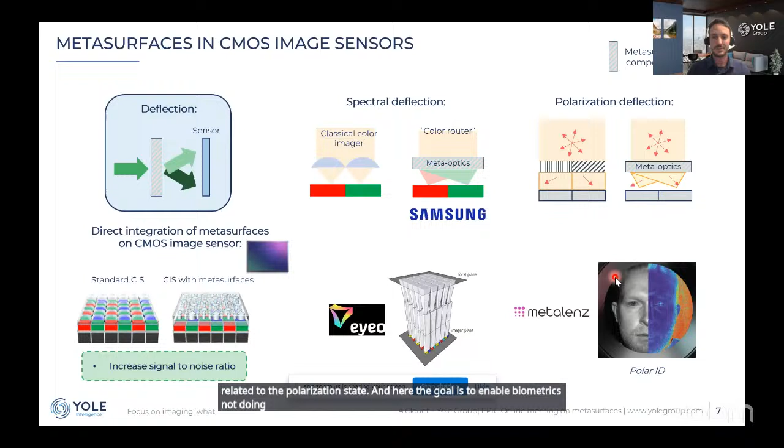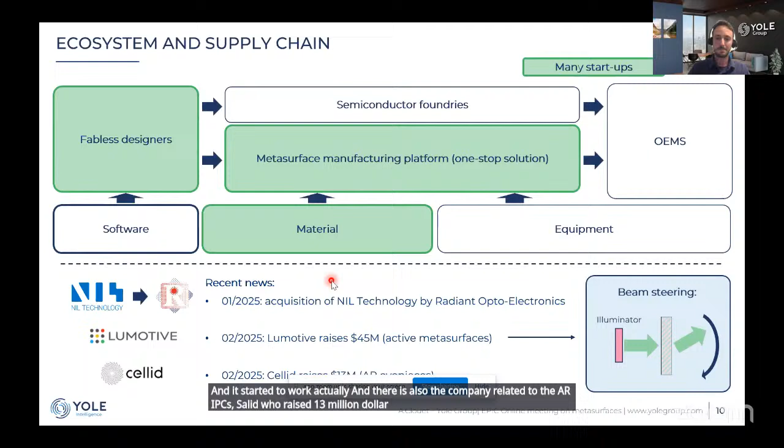And there is also the company related to AR eyepieces, Cellid, who raised $13 million a few weeks ago. Thanks for your attention, that's all for me. I hope this is a good introduction to the topic, and now I will take your questions or let the next speakers present their work.

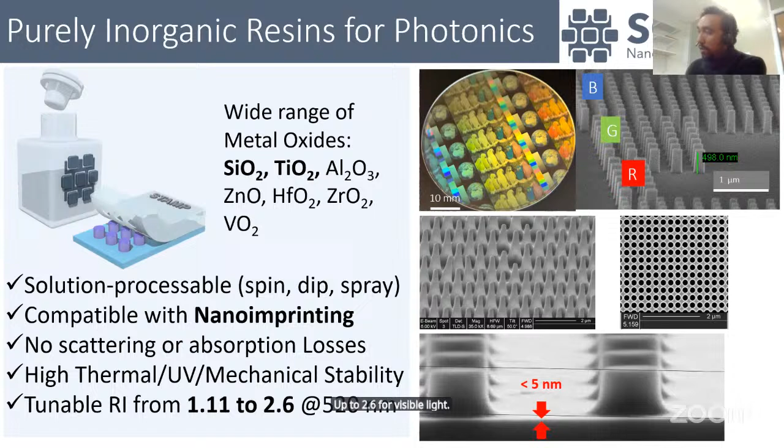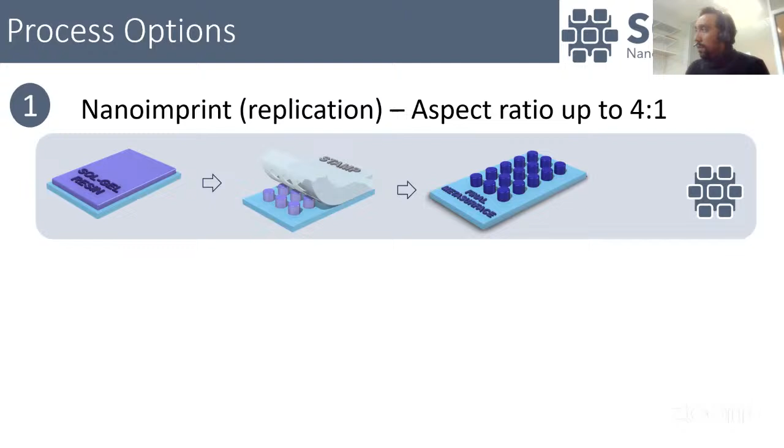Regarding the process options, our main focus today is nanoimprint lithography. This is what we developed for augmented reality applications, where you need to make these slanted gratings or binary gratings like you all showed earlier. Direct nanoimprint is suitable for aspect ratio up to 4:1. When you go to more challenging aspect ratios, although you see some publications about direct nanoimprint of high aspect ratio, I think the easiest way and what most of the industry is doing today is to use traditional top-down etching approaches, which are used today in the semiconductor industry or with microelectronics. What we propose there is just to replace atomic layer deposition or PECVD by a coating made by spin coating to reduce the cycle time, and then you can use your standard process based on nanoimprint lithography or deep UV to etch this layer.

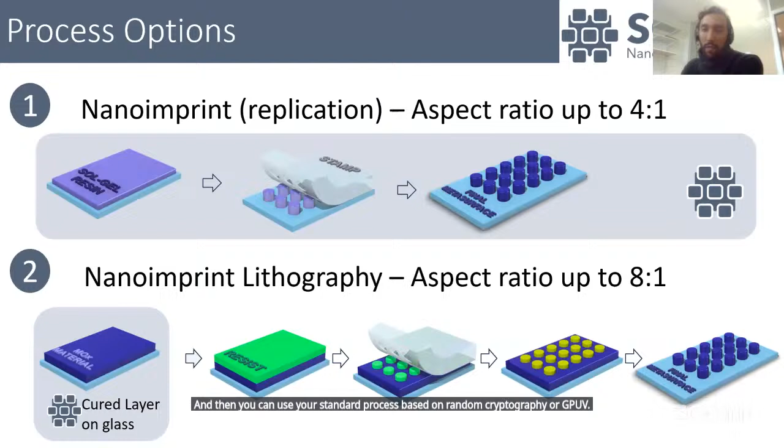So now if we come back to the refractive index range that we can cover, why is it important to have such a refractive index contrast? Usually when you work on a metasurface, the base building component is what we call a meta-atom. You have pillars, usually of high refractive index materials, and you play on the dimension to have full coverage of the phase to develop your metasurface. Usually for integration into a product, you need some kind of encapsulation layer to protect this metasurface from mechanical damages and to have better integration into your product. What's important there is the refractive index contrast of this encapsulation layer with the metasurface.

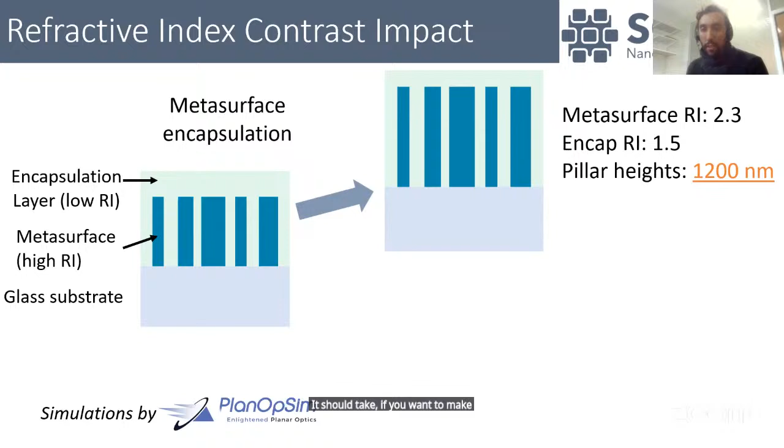If we take an example, done with the help of PlanOpSim for the simulation: if you want to make a design for visible light at 520 nanometers using a material with a refractive index of 2.3 and an encapsulation layer of 1.5, you end up having to etch pillars with a height of 1.2 microns. On the other hand, if you can increase the refractive index contrast, going to a refractive index of 2.55 for the metasurface and reducing the refractive index of the encapsulation to 1.12, now you only need 600 nanometer pillar height. So it has a huge impact on the processing. Using this wide range of refractive index allows you to simplify your process.

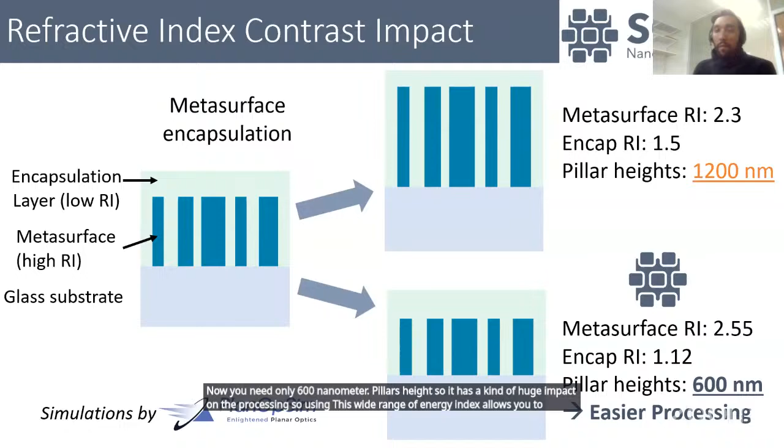So now, how did we achieve such high and low refractive index? The high refractive index we obtain using a specific TiO2 formulation. We start not with nanoparticles, it's something smaller—we start with molecular precursors, and we have building blocks which are quite specific. They have a kind of hard core and soft shell. So when you deposit this material by spin coating on a layer, and during drying, the soft shell tends to merge, and what you end up with is a very compact and dense layer, which allows us to get this very high refractive index. We managed to have very small crystal grains, which is why we managed to obtain, even for very high refractive index, this very low scattering or absorption.

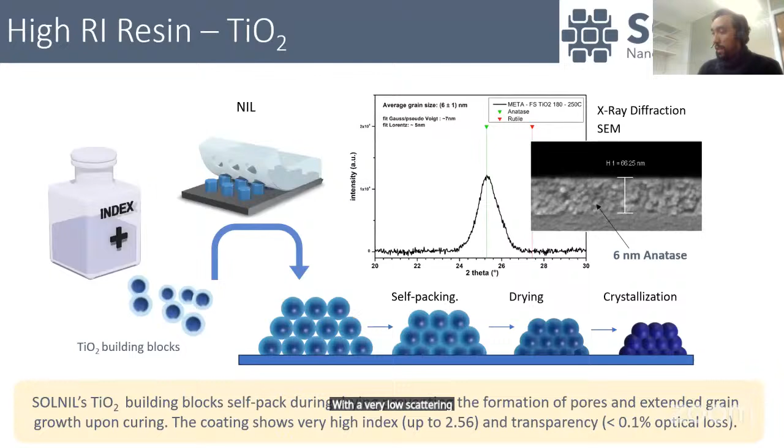For the low refractive index, the approach is quite different. We start with a silica formulation, one that can, after curing, become pure glass. What we did is manage to control the porosity of this layer. We managed to increase the porosity up to 75%, which allows us to reduce the refractive index down to 1.12. To keep the optical quality and clarity, what we need to do is not control the crystal size like we did for TiO2, but control the size of the pores. We have very small pores below 10 nanometers, and this is why we have no scattering or absorption, because the pores are very small.

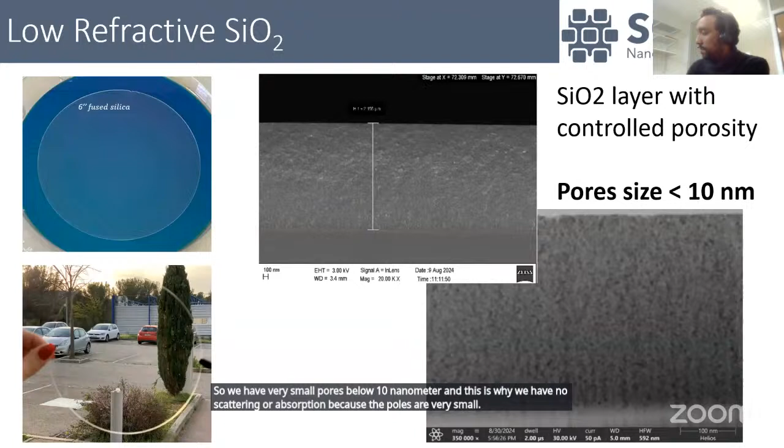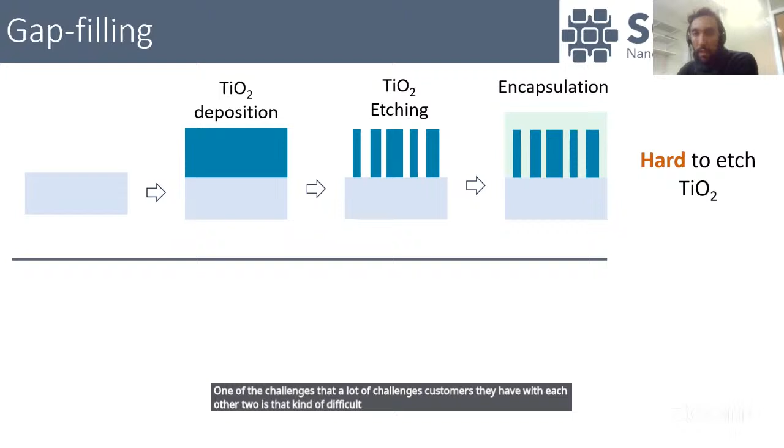This is a key. So far, what we've shown is the standard approach to make metasurfaces: you start with a thick layer of the high refractive index material, you etch it, and then you do the encapsulation. One of the challenges a lot of customers today have with etching TiO2 is that it's a difficult material to etch. They have to come up with very slow etching processes—sometimes they use atomic layer etching, which is quite slow.

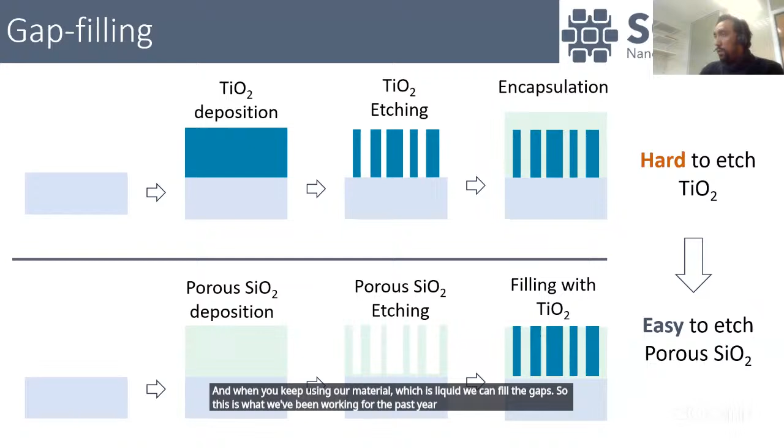So we've been working on another approach at Solnil, going the other way around. What we did first is ask: can we, instead, since our materials are liquid, just make holes in silica, because silica is very easy to etch, especially porous silica? You can very easily etch very deep grooves into silica, and then, using our material which is liquid, we can fill the gaps. This is what we've been working on for the past year. It's a process that now is working well and running for small aspect ratio, with an aspect ratio of 1, and regular patterns. So now it's something that is scalable to large area.

So basically, we just start with nano-imprinting a low refractive index material, and by using specific deposition parameters and specific chemistry, we manage to have only a selective deposition in the holes. Today it's very efficient and works quite well for standard, uniform patterns. Now we're in the process of developing this further for metasurfaces and more complex designs.

So, as a conclusion, what we have been working on at Solnil is really to extend the range of refractive index, to simplify the fabrication process of optical metasurfaces. You can find more details on our website for each material. And today, we're interested in partnering with end users or design companies who have some ideas about metasurfaces, who would like to work with us to show how our materials could enable their designs. Thank you.

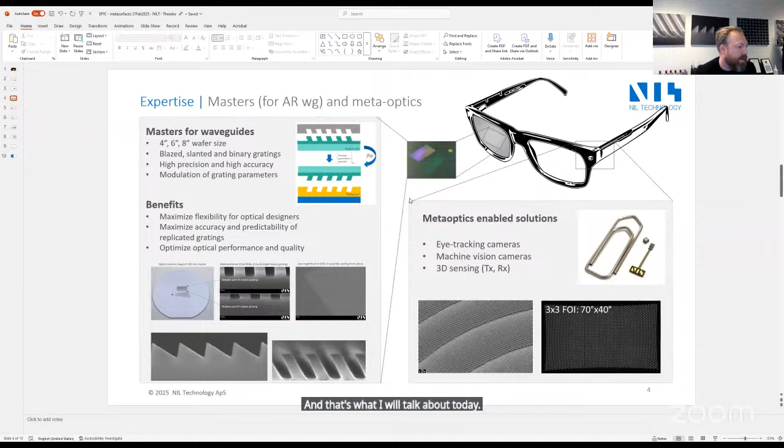I think I mentioned already, we do a lot of masters. That won't be the topic of today, but the majority of our development efforts and investments goes into establishing manufacturing of meta optics, and that's what I will talk about today. I think in this crowd, I don't have to explain what meta optics is.

What we do is bring a full solution forward for manufacturing. We can operate in what I would call a classical foundry model. We can take in designs from our customers and adapt them to our process. We can manufacture it, test it, and ship out the optics. We can do dicing, we can ship out the wafers. I think it's up to our customers.

But we also have the capacity and capabilities to take a larger responsibility. So taking in the optical specifications, we can and will design the meta optics to meet those specifications, and then we take it through the full loop again. As you will see later, we have the technology available.

We can even, and we are shipping cameras as test products right now, built with our in-house technologies. We are doing a great deal of prototyping. We do that by electron beam lithography and etching. It's a technology that's very natural for us. We've been doing this for the last 20 years.

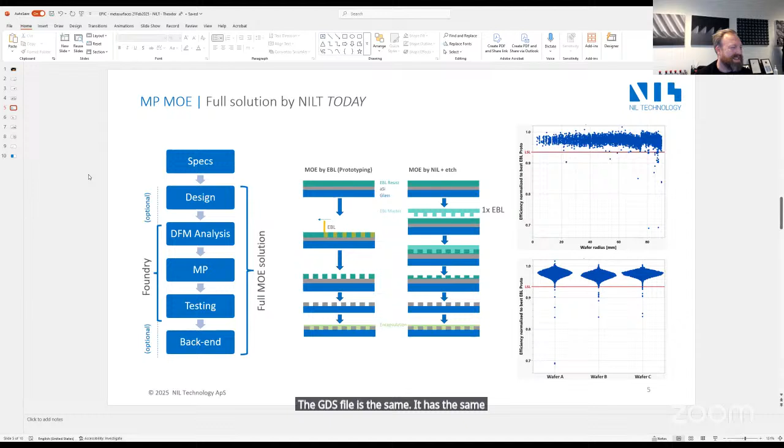This is very similar to making masters for nano imprint. Transferring the process to mass production is a very similar process to creating the master. The GDS file is the same, it has the same file size, to answer the questions from before.

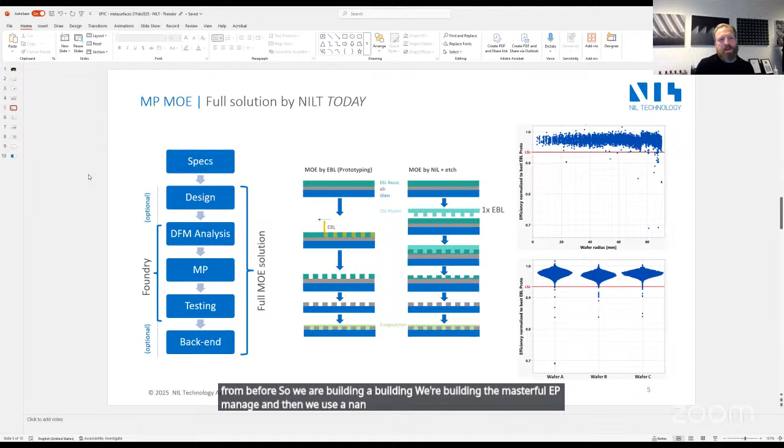So we're building the master with e-beam and etch, and then we use the nano imprint in lithography mode, as Barbara also pointed out. We're using nano imprint in lithography mode, and we use the imprinted pattern as an etch mask to etch the meta atoms out, typically in amorphous silicon in case of near infrared.

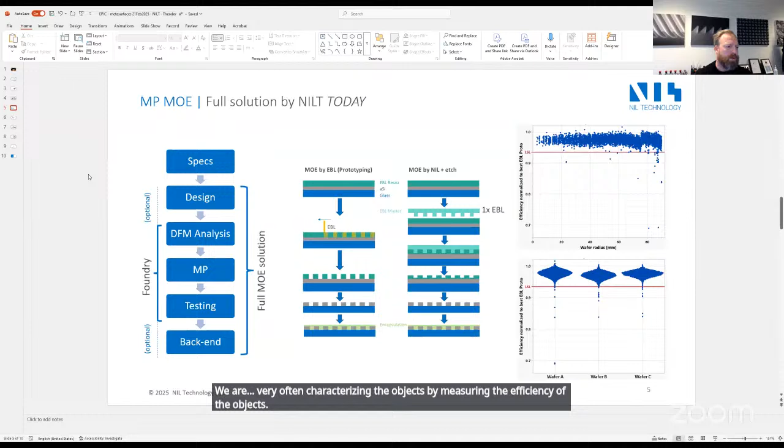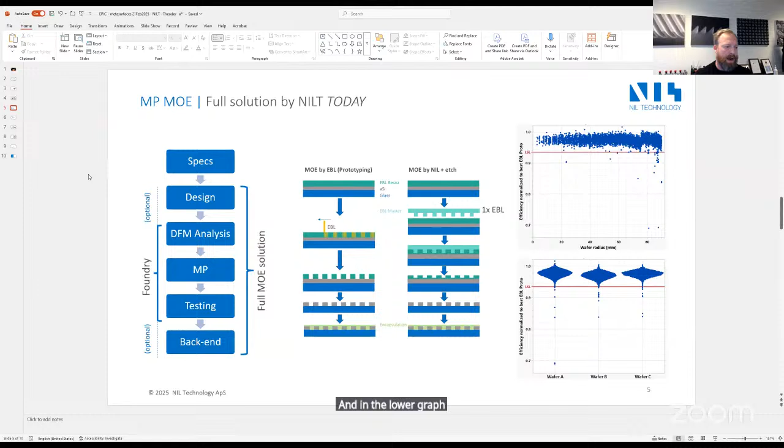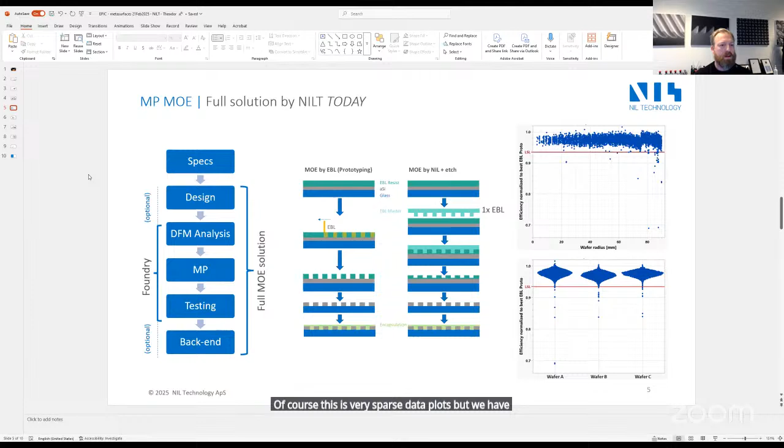Without going into too much detail, but I have some data here. We very often characterize the optics by measuring the efficiency. On the top plot, you see how the efficiency changes as a function of radius on the wafer, and we control the process very well. In the lower graph, you see how we have repeatability from wafer to wafer. Of course, this is very sparse data, but we have plenty of data to convince anyone about having a very reliable process for bringing up the meta optics for high volume.

About a year ago, we made a publication about how we align our in-house design with our prototyping and mass production capabilities. This is how we set up our process by understanding and controlling the design and making sure it fits with our process capabilities. There's a reference here, and anyone interested can send me an email and I'll forward the paper.

Basically what the graph here shows is that what we simulate from an efficiency point of view for a simple focusing lens is also what we build in prototyping using e-beam and etch, which is also what we build when we take it to nano imprint and manufacturing. So we have a very good understanding about what we do, and it gives us a very high level of confidence that when we design, this is also what we build and what we will get out.

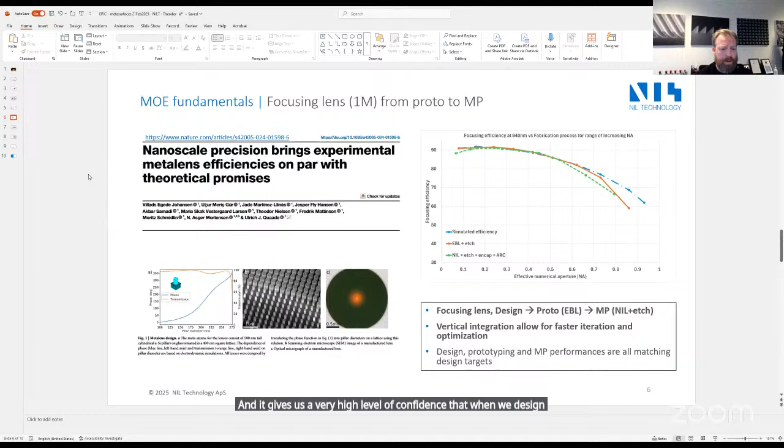About a year ago, maybe a little longer, we saw that the meta optics industry was definitely maturing, and I see a lot of people reflecting this. One of the challenges we faced was that people thought it was interesting to consider meta optics, but they didn't really see the use cases. They had doubts it could be taken beyond nice academic papers into real use cases.

We took up the challenge and said, okay, why don't we build a camera? It's difficult — to build a camera is difficult, period. To build a camera purely based on diffractive optics is very difficult. So we came up with this, the Meta Eye. We built a small camera with a focus distance of 15 millimeters.

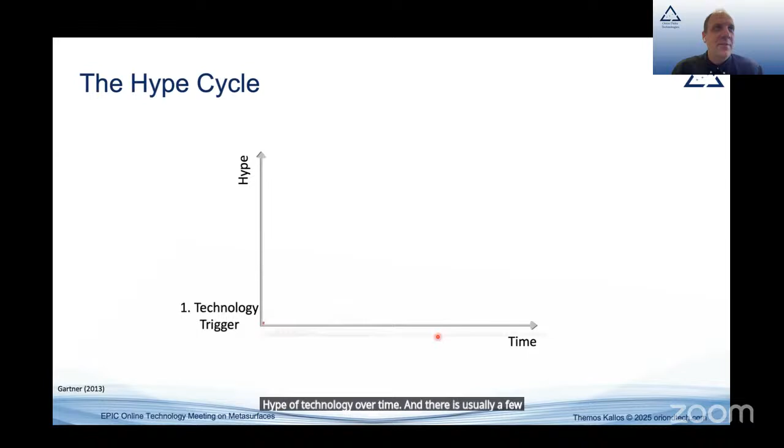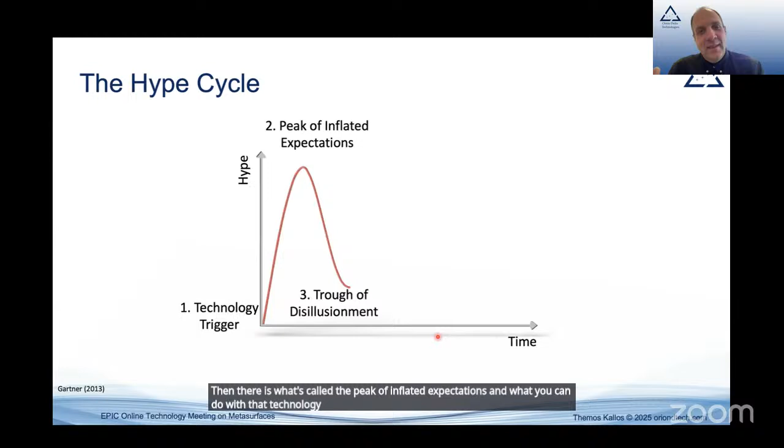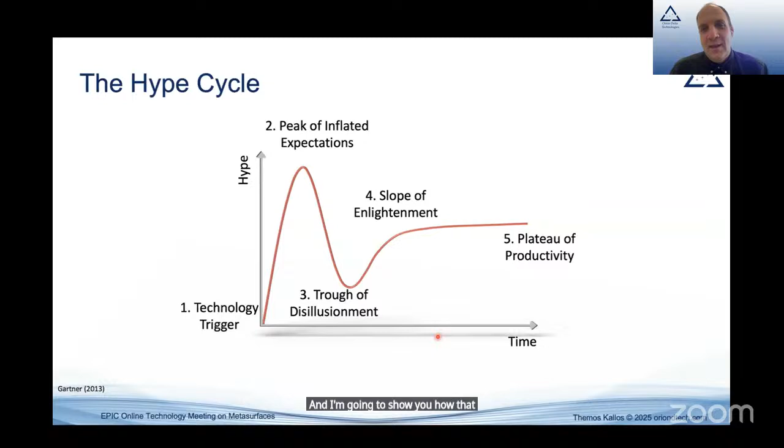There's some kind of technology trigger that creates a spark. Then there is the peak of inflated expectations on what you can do with that technology. Then this usually dies down. There is a trough of disillusionment, but things gradually pick up again with the slope of enlightenment, and then you reach a plateau of productivity, which is usually lower than the peak was. And I'm going to show you how that looked at the time for metamaterials.

Before I do that, just a couple of words about what we do. Orion Delta Technologies is an SME based in the UK, founded only last year. The team was previously with Metamaterials Inc., a NASDAQ-listed company with over 200 people working on metamaterial applications, that unfortunately had to shut down operations last year. So we've picked up some of the technology and know-how and are continuing the effort.

This brings us about 50 or more years of commercial expertise in developing and manufacturing transparent meshes, metamaterials, and in general structured functional films, which includes metasurfaces. We do more than optics in terms of frequency range. In general, we develop optimized hardware components for various OEMs, primarily building demonstrators, design, prototyping, integration, and then we work with external manufacturing partners for volume production.

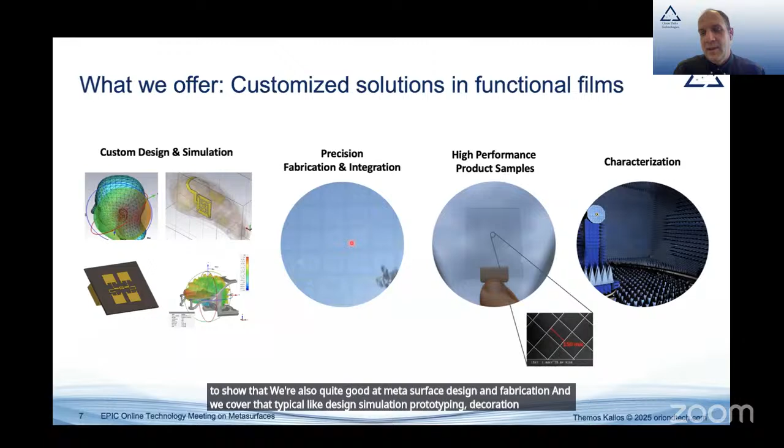I'm not going to go through all the expertise, but I marked in red to show that we're also quite good at metasurface design and fabrication. We cover design, simulation, prototyping, integration, sampling, and characterization in-house.

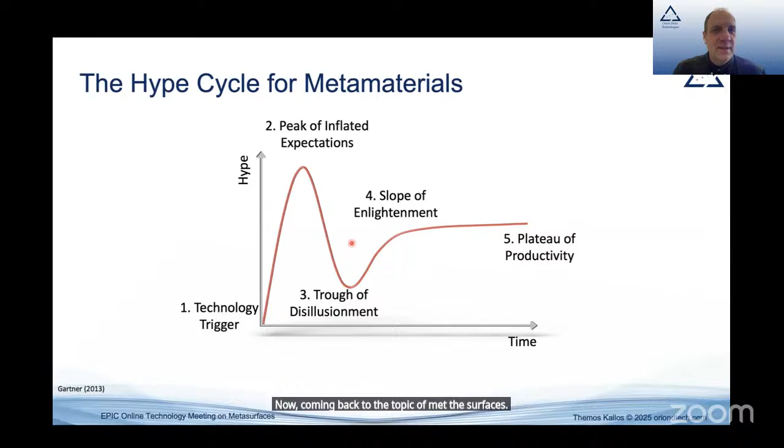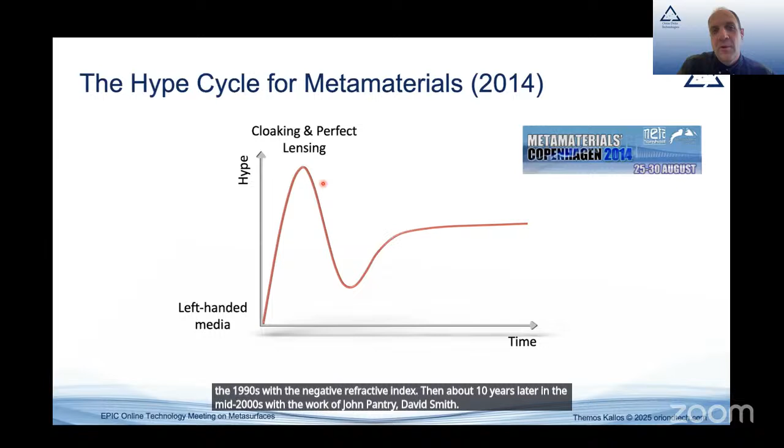Now, coming back to metasurfaces, 10 years ago I presented what I thought was the hype cycle for metamaterials. Left-handed media with negative refractive index was the technology trigger in the 1990s. Then about 10 years later, in the mid-2000s, with the work of John Pendry and David Smith, we had the cloaking and perfect lensing applications, and this created a lot of hype and brought many researchers and interested parties into the field.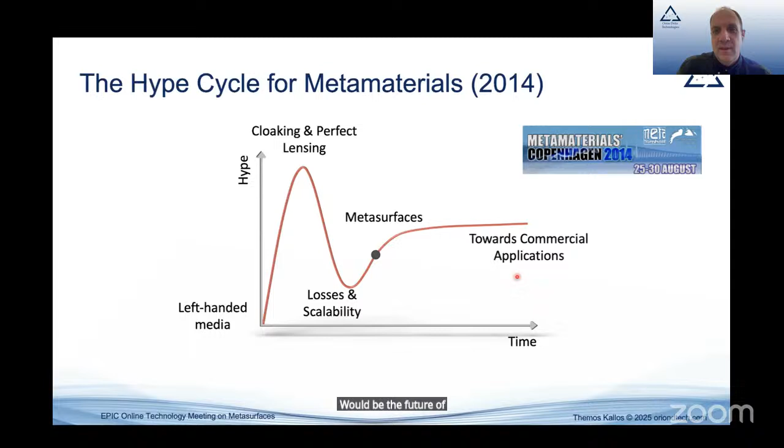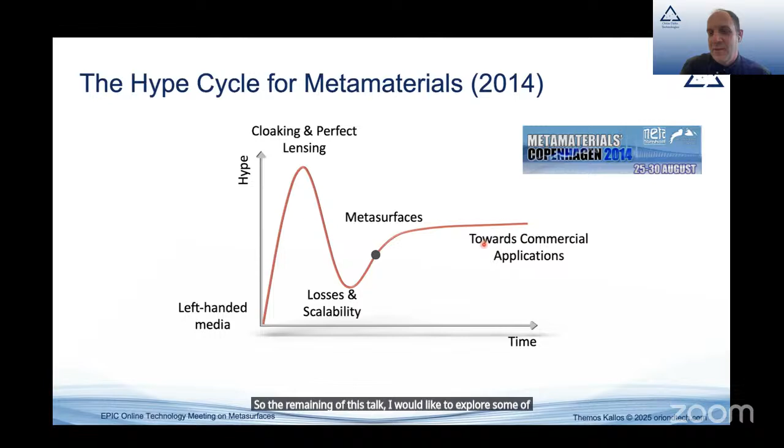Very quickly, within a few years, this died down because it was very difficult to scale up these ideas and the losses were just too large. And in 2014, I proposed that metasurfaces, which were just coming around, would be the future of the metamaterial field and would lead us to commercial applications. In the remainder of this talk, I'd like to explore some of these commercial applications with 10-year insight, and I think it's been quite successful.

I'm going to bring some examples from industry, but also metasurfaces we've developed ourselves. Obviously, there is Metalenz, I think the most popular commercial application of optical metasurfaces, where they've managed to replace multiple lenses and diffractive elements with a single structure.

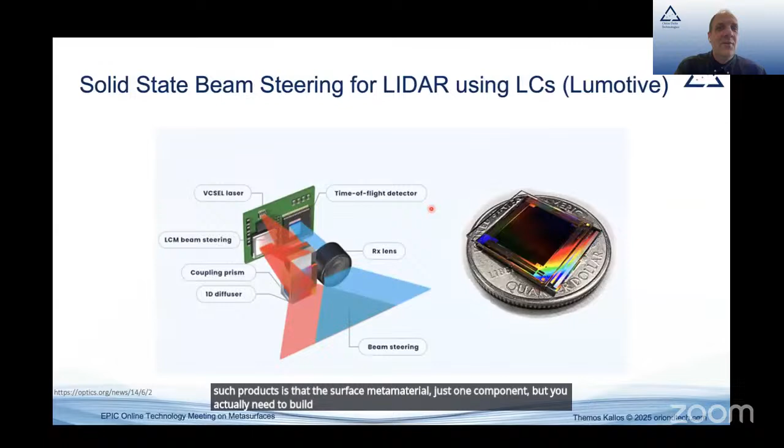And this is used for polarization and infrared imaging. Lumotive is also doing very good work. They've integrated metasurfaces for LiDAR, and they also include liquid crystal for some tunability. The difficulty in such products is that the metasurface or metamaterial is just one component, but you actually need to build the whole system to demonstrate to the end customers that this is something useful.

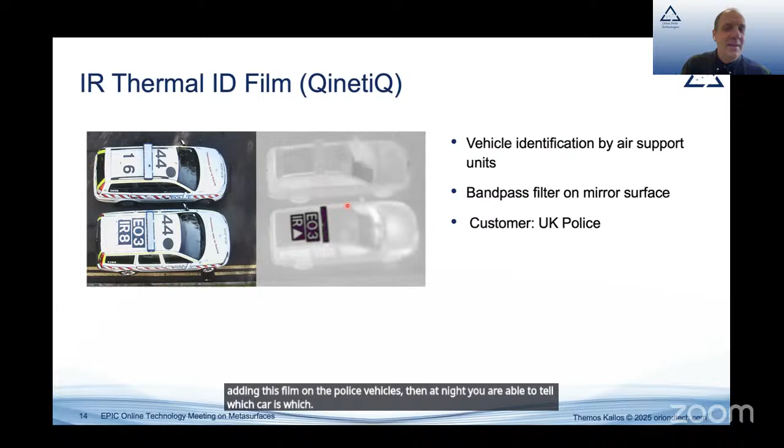Another example from the UK, from QinetiQ, there's been a film that basically has an infrared signature, and the purpose here is that when there are helicopters chasing vehicles with an infrared camera at night, it's not easy to distinguish the police vehicles from the perpetrators. But by adding this film on the police vehicles, at night you are able to tell which car is which. So that's a very interesting practical application.

Some of the work that was done at Meta Materials, since acquired by Authentix, is on banknote security. The idea there was to create plasmonic metasurfaces on microstructures, and these produce diffraction effects, coloration and motion and other structures that are good for authenticating banknotes and other security products. The benefit here is that you are able to replace the traditional micro lens with a plasmonic nanostructure, much more compact and with a much higher degree of flexibility with regards to what kind of effect you can achieve.

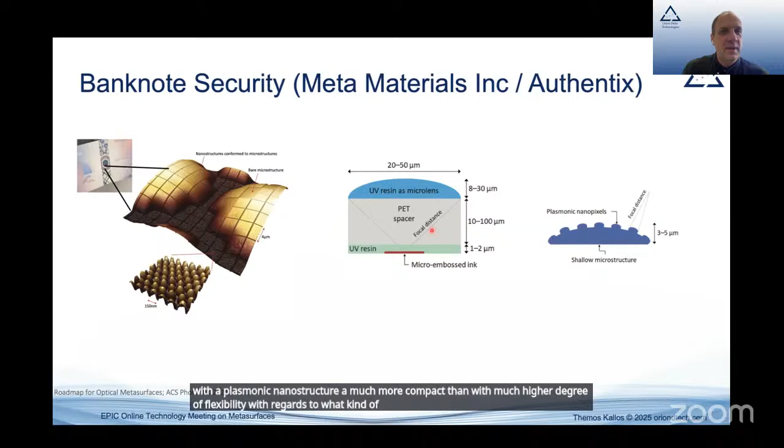Now moving on to stuff that we are working on currently, we have transparent metallic metasurface antennas, and one example is using these antennas as heaters and communication elements in LiDAR. The optics part of the application here is that you want to mitigate diffraction that inadvertently comes in when you try to install any kind of grating or surface in front of an optical component. So there are techniques you can use to mitigate this diffraction so that the LiDAR sensor can operate efficiently.

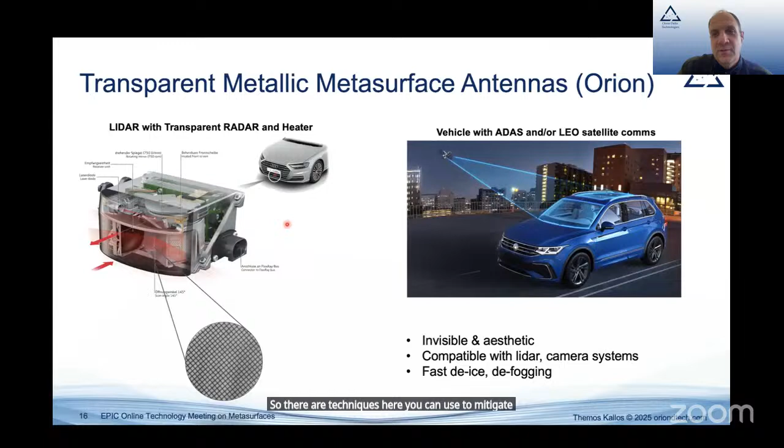So the idea here is that you use a metasurface made not out of nanoimprint, but out of a hologram. This allows you to create masters that are much cheaper, and then you can create individualized masters at a reasonable cost so that you can mix and match each person with the reflective optical combiner that's best for them.

In combination with this technology, there is capability to integrate this inside lenses instead of on top of lenses. You can cast a lens around your optical combiner element, and this allows you to do conventional post-processing with all the ophthalmic techniques and not have to worry that you have a very, very sensitive metasurface element that you have to protect.

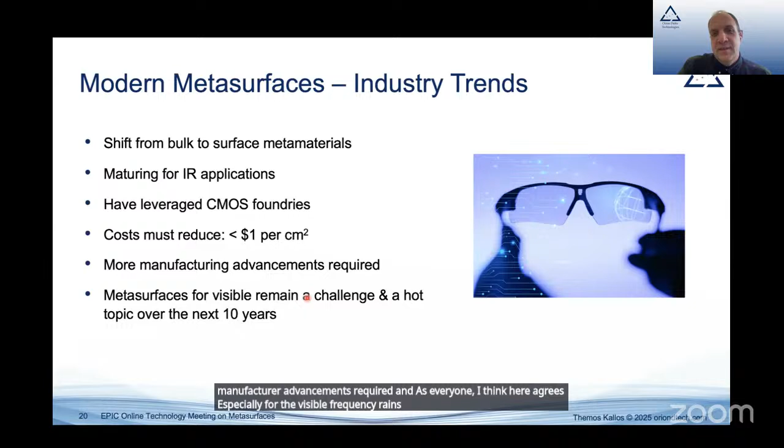As a starting point, if you're starting in this space, you need to be able to produce an element, I would say, for less than $1 per square centimeter of surface area. There is obviously a lot of variation there, but that's roughly the order of magnitude you should be looking at. This means more manufacturing advancements are required, and as I think everyone here agrees, especially for the visible frequency range, this is still a bit of a challenge, and I think it will remain a hot topic for the next 5 to 10 years.

And just to close off with where I think the innovation needs to happen, what are the issues currently with metasurfaces? Obviously, limited bandwidth: it is difficult to produce a very wideband metasurface without many artifacts. The efficiency is still relatively low, especially in transmission modes. People tend to prefer reflective elements for that reason.

The tuning still couples amplitude and phase right now. These two cannot be controlled independently very well. There is limited tuning range, especially in the phase. Ideally, you want very easy 0 to 2 pi control, without many artifacts and with good efficiency. I think this is because the tuning mechanisms right now are limited—there are only a couple of things you can try, and some new ideas are needed there.

Finally, many of these nano-imprint and other manufacturing techniques are incompatible with CMOS technology. I think the reason some companies have been more successful is that they've managed to integrate their designs and piggyback with CMOS technology that has been around for decades and has been cost optimized. So we need to find ways to tighten this integration, in my opinion. With that, thank you for your attention, and I'm open for questions.

We focus on 3 or 4 main pillars with our technology, and 2 different tools depending on the wafer size we need to coat - a 200 millimeter or 300 millimeter wafer in diameter. And out of these 4 pillars, we focus on the technology itself.

So we aim to optimize the technology for the different types of applications and products. And it's a technology that is already well proven in the market - we have more than 200 of these systems installed worldwide.

We are also going in the direction of semiconductor, and in semiconductor, particle control is fundamental. So we have developed our technology to produce the lowest level of particles possible, and we have recently reached the target of below 100 particles at 160 nanometers or more. So this is the target for semiconductor fabrication.

When we come to the filter, we aim to achieve the highest uniformity on the highest wafer size possible, and you can see here that we are achieving up to below 0.23% on a 300 millimeter wafer.

And finally, we also focus on automation, by providing solutions to manual and automated loading of wafers, which include solutions for 200 millimeter and 300 millimeter wafers. So this is just an overview of the technology and the company itself.

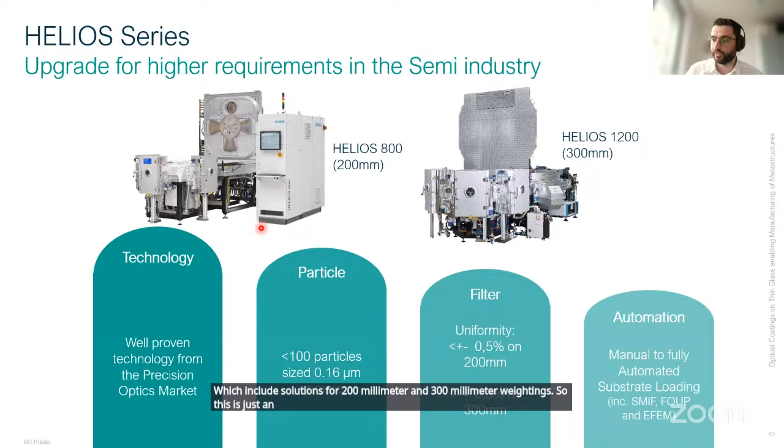So I don't think I need to explain this slide. This has already been touched upon a couple of times during the meeting today.

But the aim of the Metalens is to reduce the cost and reduce the size of the optics used in different applications. So we have emerging applications such as AR, VR, and we have also the evolution of imaging technologies, and all of them can benefit from the reduction of these units.

So Metalenses pose the promise to reduce the size and cost of the traditional optics currently being used. And here, our technology, our Helios series, we believe can help the ones actually working in the fabrication of these structures.

We have a lot of know-how that we can now pass on to the Metalens world and market. So we have worked on titanium oxide coatings, which was already presented today. We have extensive work on color filters, anti-reflective coatings, as I mentioned before, and low particle coatings. So this is well within what we have experience on.

And I've skipped the point of thin glass because this is the focus of today. So we also aim to provide coatings on glass wafers of a certain thickness. So we'll talk about thin glass handling and thin glass coating. And why thin glass?

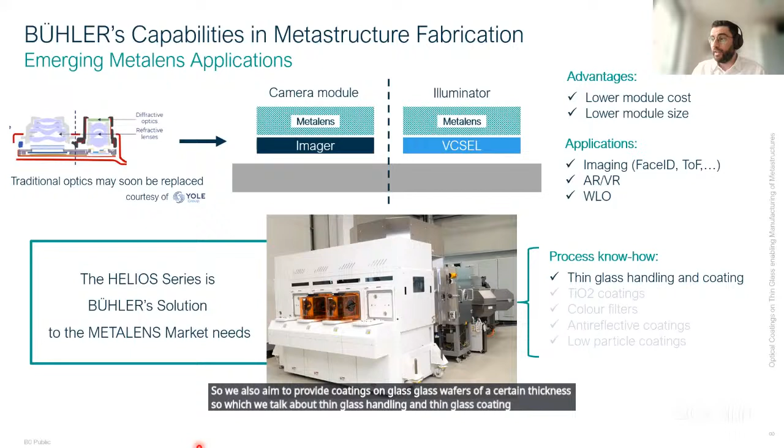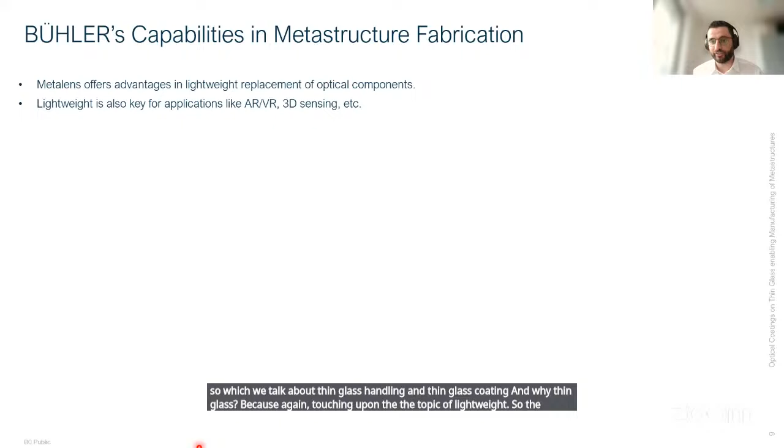Touching upon the topic of lightweight, the promise of metastructures comes from the reduction of size, which then reduces the weight of the units used in various applications. So when we go to AR, VR, for example, lightweight is a very important, key point.

When we couple this to the increasing demand for cost reduction, which goes in the direction of increasing the number of products that can be used in a wafer, meaning increasing the wafer size, we see a challenge from our investigation: if we increase the wafer size but still build traditional optics and structures on wafers with a certain thickness, we start seeing problems arising from the type of stress that coatings can give rise to.

What we are looking at here is a wafer with a thickness of 0.21 millimeters and a diameter of 300 millimeters—a traditional wafer size, but a much smaller thickness. When you do a coating on a wafer like this, a traditional coating might end up in two different results: the wafer bends a lot, or more problematically, the wafer completely breaks during processing.

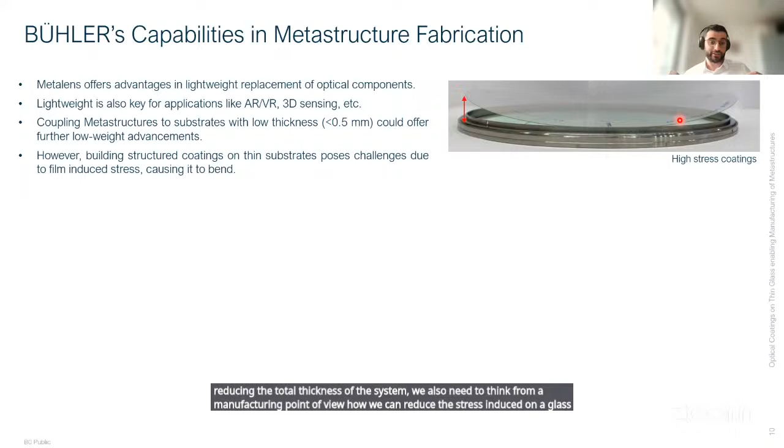So if we are going towards lightweight solutions and reducing the total thickness of the system, we also need to think from a manufacturing point of view how we can reduce the stress induced on glass substrates with a certain thickness and diameter. This is what we are working on—we've spent significant time developing processes that reduce the stress induced on the wafer.

What you see here now is an optical coating—basically the same optical coating as on top, but with very, very low stress induced. This means we are now capable of doing coatings with a certain thickness that give rise to very little stress on the wafer, so they bend less and less. When we go to manufacturing of the metalenses, this could be a good step towards producing different structures and types of coatings on wafers of a certain size.

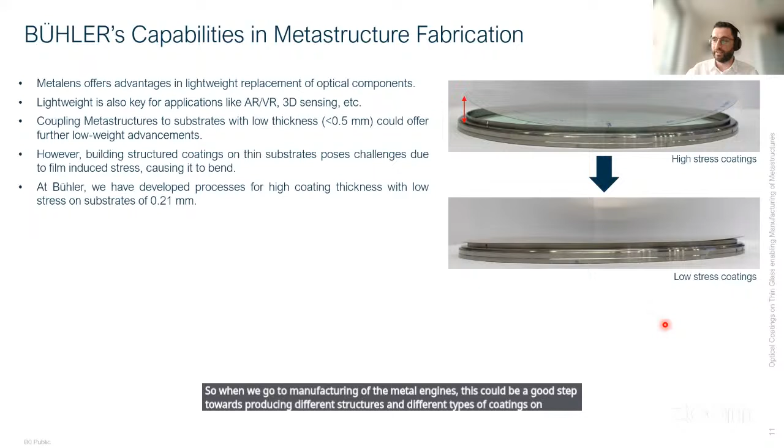More importantly, as I said before, uniformity is key. We also measured this 1.2 micron thick AR coating, and you can see the performance here. On the plot, we measured different points of the wafer to understand if there is a variation in optical performance, and overlapped all the transmission plots.

When we zoom in onto a specific area, you see that within the wafer we are achieving plus minus 0.25%. This means we can coat these thick coatings with low stress and high uniformity across a wafer size of 300 millimeters, and more importantly, a wafer thickness below what is currently used in the industry. We now have solutions for doing coating on thin glass, which we hope can benefit the field of metastructures.

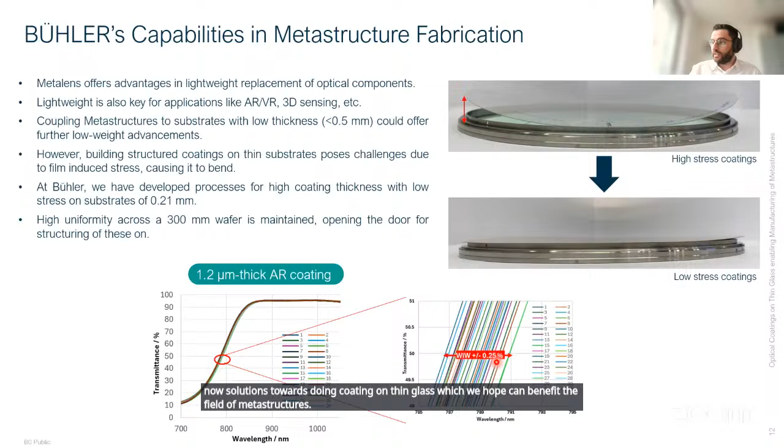As a conclusion, I hope I've made a bit of a teaser of what we are working on, and now I hope I can answer the two traditional questions from EPIC: what we can do for EPIC and the EPIC members, and what the EPIC members can do for us. We've shown here that we can work on thin glass coatings.

I didn't touch much on the topic of throughput and handling, but this is also something we work heavily on—we try to increase the throughput of production in order to optimize the number of product wafers that can be done. We've also developed solutions for automation, really bringing the wafers in and out of the fab. So we are now fully capable of doing anti-reflective coatings or functional layers, which can be used later on glass thickness of 0.21 millimeter.

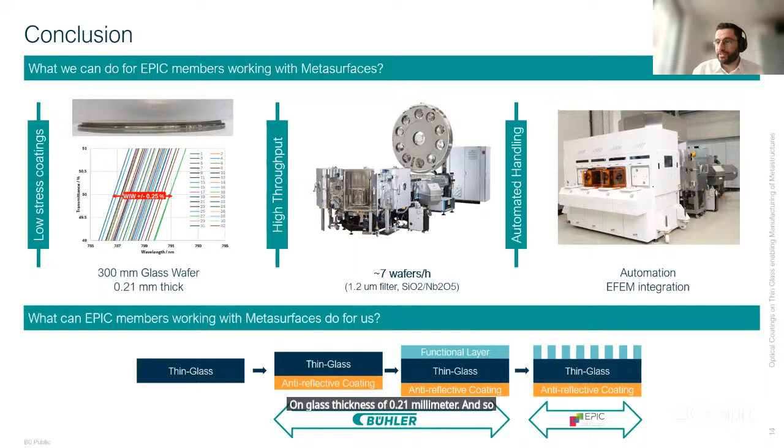So what the EPIC members can do for us: we want to understand if this is the right approach, if we're going in the right direction. This is where the EPIC members could really help us, doing the functionalization and the metastructure fabrication. We hope that we can enable this manufacturing step.

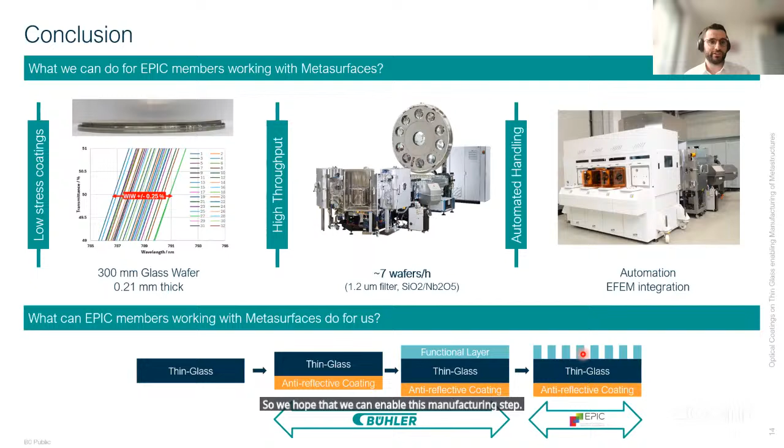Thank you, Daniel. Thank you very much for this nice presentation. Any question for Daniel?

Yes, Dominique from Photonics Biz. Hello, thank you very much for the presentation.

Do you have optical measurements or refractive index data on your layers, and different results on that, as shown?

In terms of optical performance, we can't share everything in such a public forum, but I can give you some hints. For example, regarding titanium oxide, we have made publications on our titanium oxide production, where a refractive index of 2.5, 2.51 is possible with a high level of amorphous structure. I'd recommend, if you'd like to know more, feel free to contact me, and we can share these publications with you.

Okay, thank you very much. You're welcome, thank you Dominique. Any other questions for Daniel? Okay, if we have no more questions, thank you again Daniel.

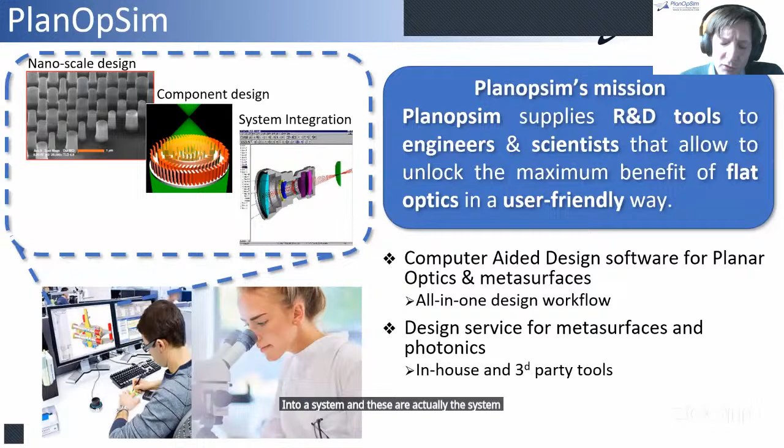Our tool scales: when you want to design a metasurface and integrate it into an application, you need to design from the nanoscale pillars over to large area components and then integrate these into a system. These are the different design scales we incorporate into our tools. Our team can support the whole workflow through our software and services, from the very initial step, where we see refractive optics and diffractive optics.

The first question a designer always has to ask is: what type of physical mechanisms, what kind of optics do I need to use to solve this problem? Metasurfaces are not the solution for every problem, but they do give a lot of new design options. So in this concept stage, we are already supporting our users.

Then we go on to model systems. This is traditionally done with ray tracing, because there are so many free variables that it's really the only way to model a system. But we inform the ray tracing with the capabilities of the nanostructures that come from our full wave solver. We then use these libraries of structures, integrate them into full components which can go up to the centimeter scale, validate that, and integrate it into fabrication as well.

I'll show a couple of examples of this in the next slides, but rapid iteration through these various steps is very important if you want to take something from a nice academic curiosum to a real product, and that's why we support this as closely as we can.

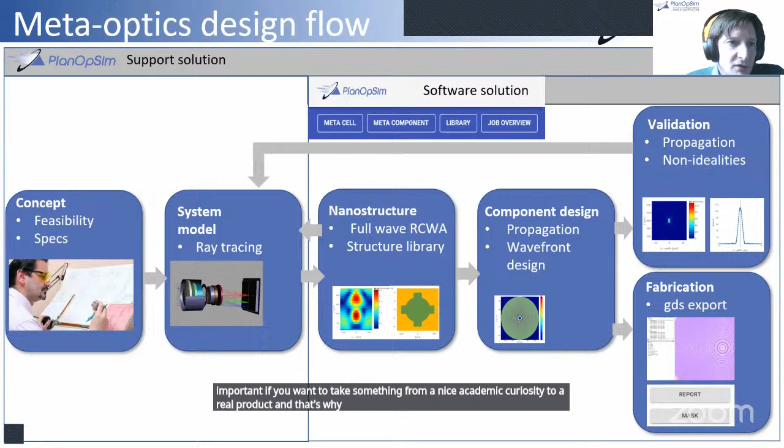The first step is always to design the nanostructure. This is sub-wavelength scale, so we need full wave Maxwell solvers. Anyone who has done Maxwell solutions knows it's very time consuming but very accurate. In our software we use the RCWA algorithm; others use FEM or FDTD. The bottleneck remains the same—you need to calculate these whole structures—and the results are comparable. We pick RCWA because it's generally faster than the other methods.

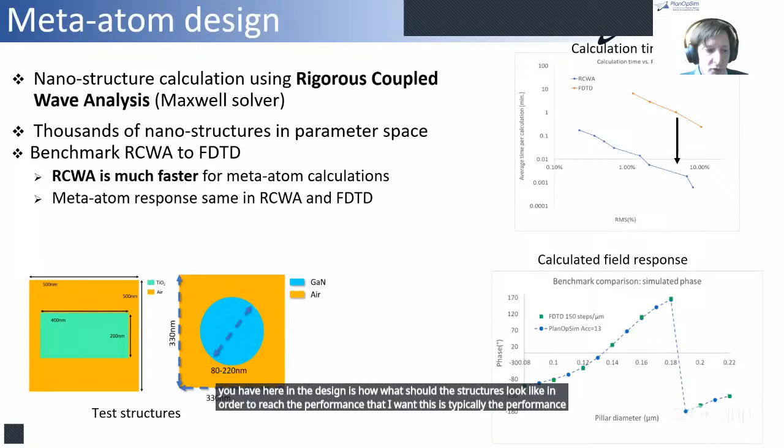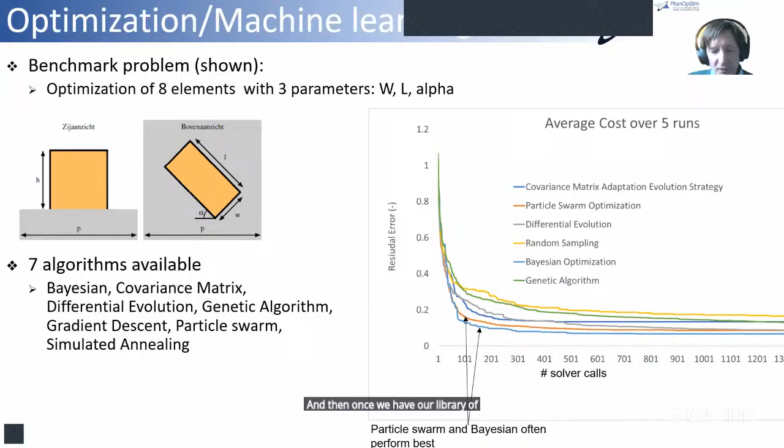It's not so practically useful, but it's a good reference problem. And then once we have our library of nanostructures, of course, we want to go on and make functional components like lenses out of that.

Then we go on to the component design. For instance, here we have a small lens that we've generated as a demonstration. So what you do as a designer is you identify through ray tracing or through theory what's the required lens profile, the wavefront that you want, and you map that back to the different structures that you have available that can be manufactured. Then you calculate what should the shape look like, what's the GDS, what's the projected phase function, and what's the final efficiency point spread function, and so on and so forth. So all of that is then calculated.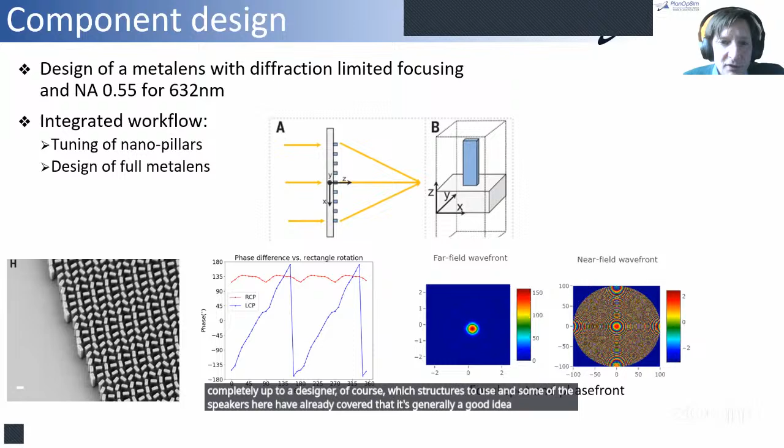In this example here, we're just using titanium dioxide pillars, but it's completely up to a designer, of course, which structures to use. And some of the speakers here have already covered that it's generally a good idea to have high refractive index contrast. That's why we're looking at these dielectrics for this type of design.

And once you have your design, you can have it manufactured. So we produce the GDS file directly. This is an example that was created by one of our customers. So they use the software to generate this IFTA phase-only hologram meant to project an image onto the asphalt. The GDS rolls out and is fabricated.

Here you see an SEM image and performs as a very compact projection optic that is then used and measured and was up to 70% efficient. That doesn't sound like a lot, but if you use a conventional projector, those are actually only 10% efficient. So this is a very nice step up from that.

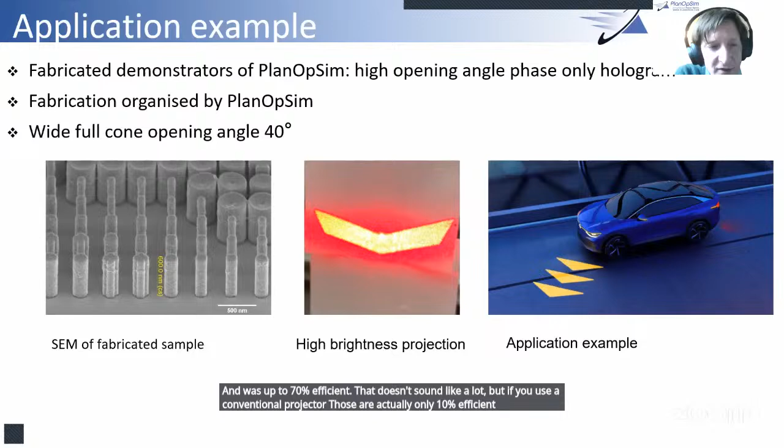For practical applications, we need large sizes of design. And if you look at conventional methods of designing this, especially the full wave simulations, they are typically restricted to at most 100 microns or something of that area.

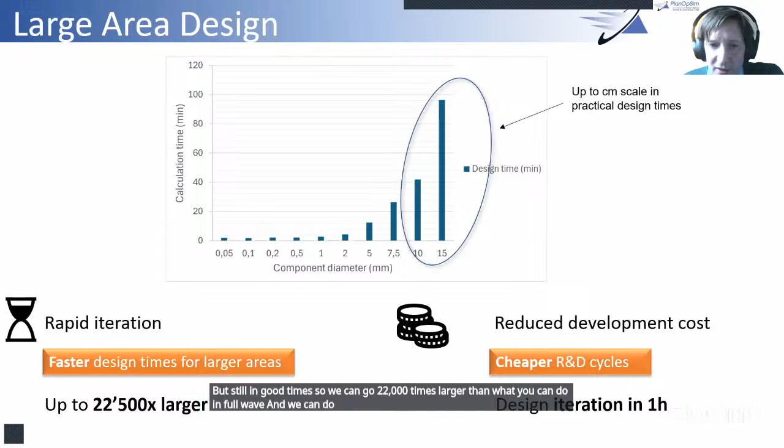By using multi-scale simulations, we are actually able to design much larger areas in a practical time frame. So we go up to 10-15 millimeter, which is the current design limit of our servers that we use, and this can still be done in reasonable times of almost 2 hours, but still in good time. So we can go 22,000 times larger than what you can do in full wave, and we can do this in short times so that we can iterate rapidly through different designs.

We can also apply different methods to have more accurate calculations of the nanostructure's behavior. So some of you that have a bit of experience with this know that often people rely on using the pillar as if it's surrounded by all the same structures, where in reality they are different structures. This is called the local periodic approximation. It's a very fast way of calculating, but it comes with known limitations, especially if we go to high numerical aperture lenses, for instance. If we use an overlapping domain analysis that also takes into account the surrounding pillars, we can still calculate rapidly because we are working on subsections of the lens and iterate through the whole lens.

We can calculate large areas without having to full wave calculate them, which would blow up any high performance computer's memory limits. So we can still do this in this way.

And then we can go on to fabricate these metasurfaces. So if you don't have your own fabricators, the photonics world has since a long time known the concept of PDKs, process development kits. Since 2023, manufacturers are offering established PDKs for supported wavelengths of 940 and 532 nanometers directly as a way to design.

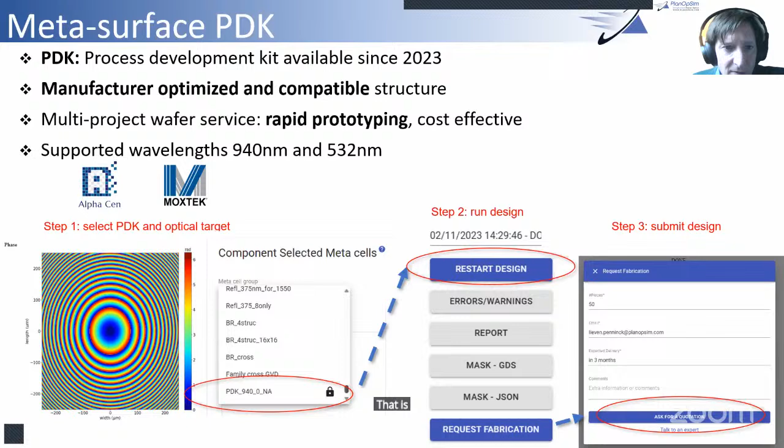So as a designer, you actually don't need to worry about which structure specifically to use. You can select the corresponding vendor's PDKs, run the design for your target wavefront, and then go through the design and send that straight to the manufacturer. So this is another aspect of rapid prototyping, rapid iteration that is developing and a sign of growing maturity for the metasurface market.

We can also establish the fabrication effects through Monte Carlo simulations of fabricating a metasurface. So if we have a nominal design and we then start to randomly introduce errors into that fabrication process, as will happen in reality, the simulation allows us to estimate the effects of that. And this distribution plot that you see here, in fact, contains 25,000 different lenses that were simulated in different ensembles. This is something that's only possible, again, through the application of multi-scale simulations.

So that's fine. We can make fabricatable single components.

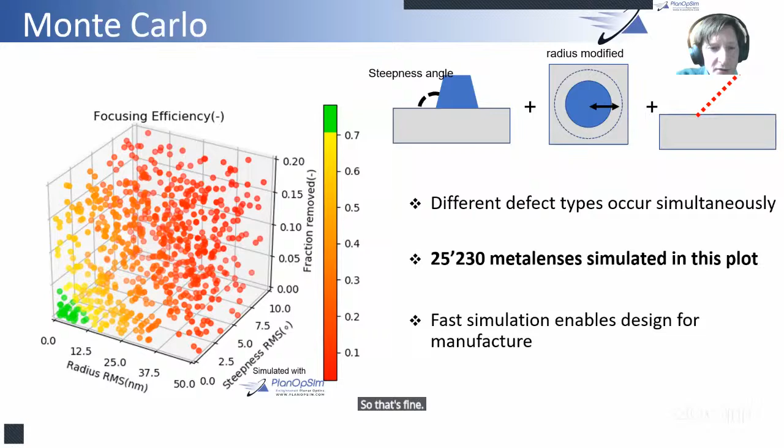We can also then integrate that into systems through plugins to ray tracing solutions. So the color router was already mentioned earlier today as an example. What we have shown here is that a designer can first design its lens system and then through a DLL plugin import the specific behavior of the metasurface into the refractive ray tracer and use their elements of the metasurface design, which are precisely the ones that you couldn't reach using refractive optics, such as this multiplexed wavefront color router

here. So we see the blue wavelength is focused on the blue subpixel, the red wavelength is focused on the red subpixel. We have this nice color splitting that you wouldn't see with a conventional optical lens. All of this is directly available and used by many of our users.

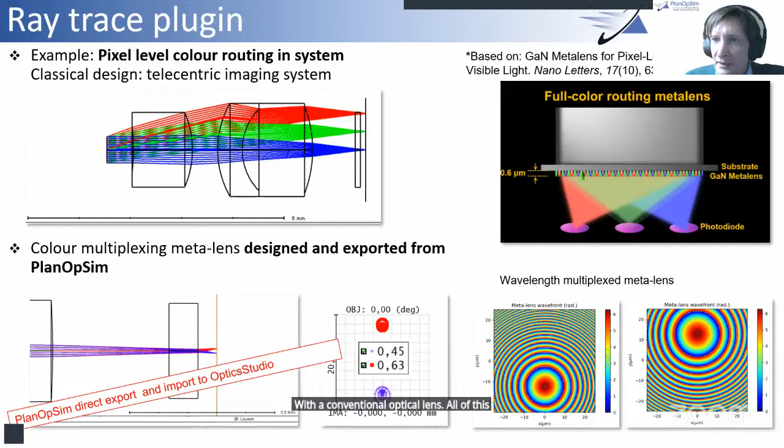I've talked a lot today about design, and I would like to wrap up here with stating that when we think about bringing a technology to market, we don't just need design, and a design tool is not just something that's used by a designer, but in fact, the whole ecosystem has to develop, and I think metasurfaces is coming along very nicely here. And there is PlanOpSim's role specifically.

So we can offer to the ecosystem design solutions and expertise to make sure that your products are fully integrated and well designed. And we are looking for partnership with all of you to improve the accessibility of meta and nano optics all over the world, to improve design for manufacturing, and to develop the high performance simulation tools needed to make this as fast and efficient as possible.

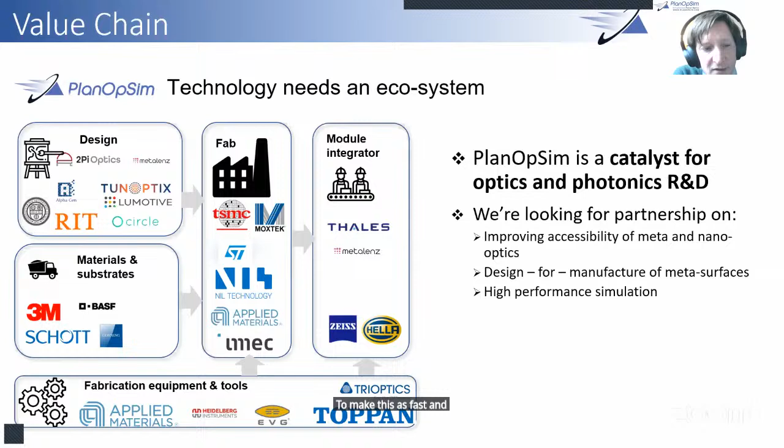Thank you very much. Thank you very much, Lieven, for your presentation. Any question regarding design? Yes, Hakan Alabos from Photonics University, please. Thank you. Thank you very much for this nice presentation.

I'm wondering about this local periodic approach that you mentioned in your presentation. So usually when we talk about this meta design, we are talking about periodic surfaces, but as you mentioned in your presentation, there can be some instances that we have using different non-periodic structures and huge areas. So my question is, what are we talking about when we talk about this local periodic approach? What is the size of these local periodic structures?

And the second question is, even with local periodicity, we will encounter some intermediate sections between two local periodicities, and how can the simulation handle these intermediate sections? Yes, thanks. That's a very interesting topic, and I think I don't have time to go into all the details here, but I propose to follow up over email about this.

But I will briefly clarify that usually, and this is a method that was traditionally used, and you find it back in a lot of papers, the local periodicity is applied on the level of a single nanostructure, what they call a meta-atom. So this is in itself smaller than a single wavelength to suppress diffraction coming from it. So this area is quite small, typically 500, maybe 300 nanometer in unit cell size. And that's the periodicity used in the local periodic approximation.

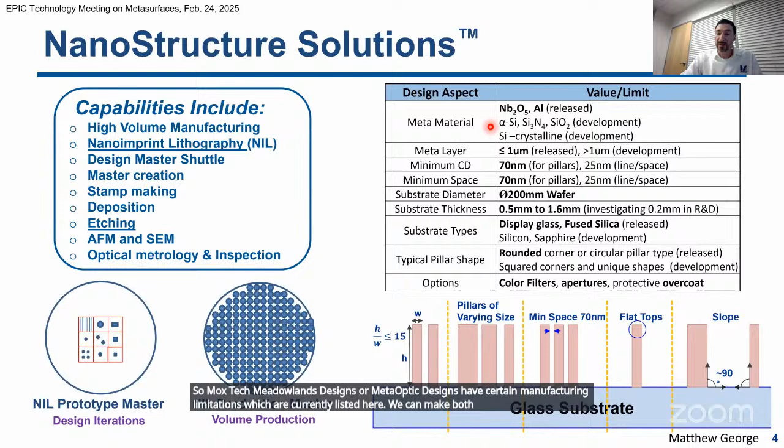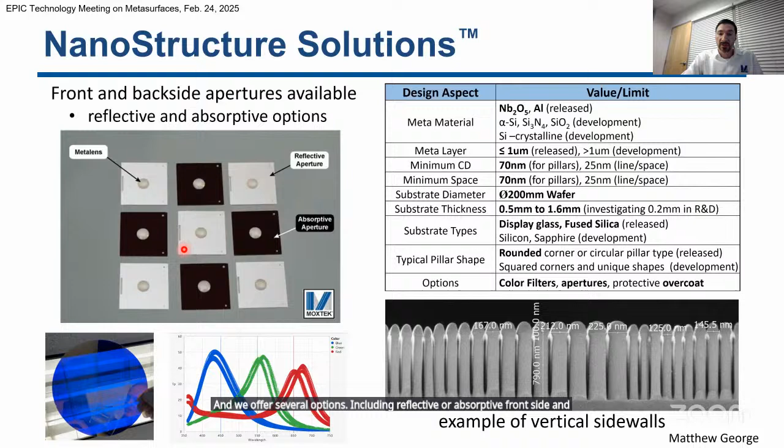So Moxtek metalens designs or meta-optic designs have certain manufacturing limitations, which are currently listed here. We can make both visible and near-infrared metalenses, and we offer several options, including reflective or absorptive front side and backside apertures, integrated color filters, and also protective overcoat, which I'll show here. This is an example of our etched high aspect ratio pillars. So the aspect ratios can reach up to 15:1.

So late in 2023, we installed a wafer scale metrology tool for MTF, focusing efficiency, and other meta-optic measurements. And this was an early result for a small 200 micron diameter metalens before full process optimization. And we saw that these smallest diameter metalenses have improved MTF performance near the diffraction limit, which makes sense since chromatic aberrations scale with lens diameter. Chromatic aberrations, of course, also scale with the source or filter bandwidth on your metrology tool. And these measurements didn't even utilize a particularly narrow bandwidth, which makes the measured MTF performance all the more impressive. So this result demonstrates the promising potential for applications utilizing small diameter metalenses.

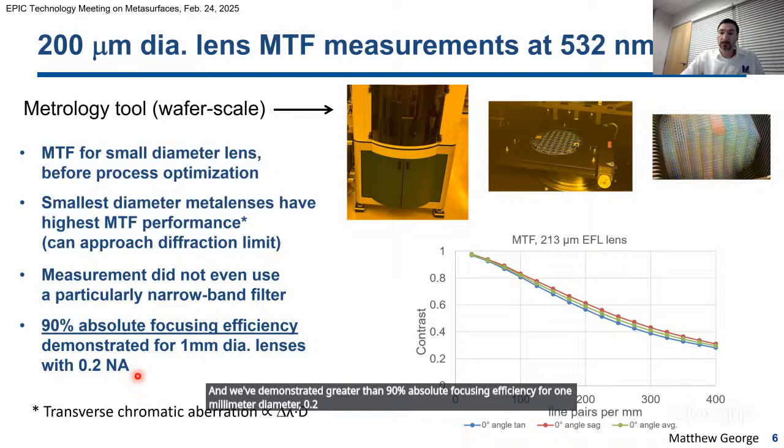We've also created methods to measure absolute focusing efficiency using this tool, and we've demonstrated greater than 90% absolute focusing efficiency for 1 millimeter diameter 0.2 NA lenses. Larger diameter lenses have more aberrations. Despite this fact, we decided to measure a 4 millimeter diameter conventional plano convex singlet lens from Edmund Optics and compare that to the performance of our red and green metalenses with the same diameter and focal length. And even though our metalenses would show better performance with an improved filter bandwidth on the metrology tool, it's important to show an apples-to-apples comparison to a traditional lens utilizing the bandwidth requirements of the end user's applications.

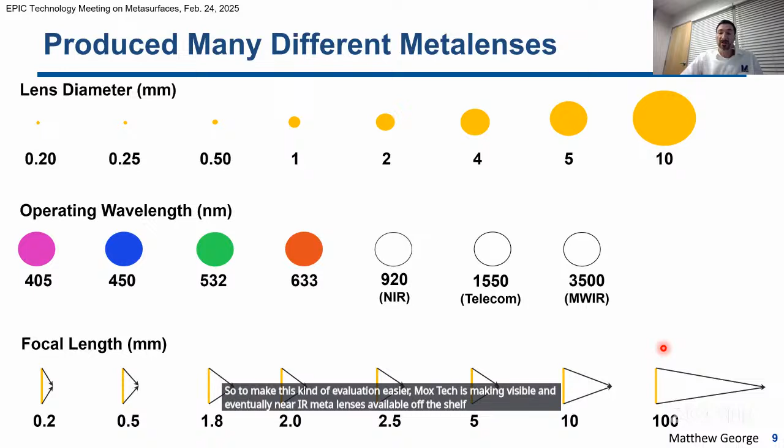Currently, it's difficult for businesses to explore the possibility of incorporating metalenses into their optical systems because metalenses are generally available on a custom order basis only. So to make this kind of evaluation easier, Moxtek is making visible and eventually near IR metalenses available off the shelf for benchtop and integration testing. So these circled samples are what we're initially offering, and other options should be available later this year.

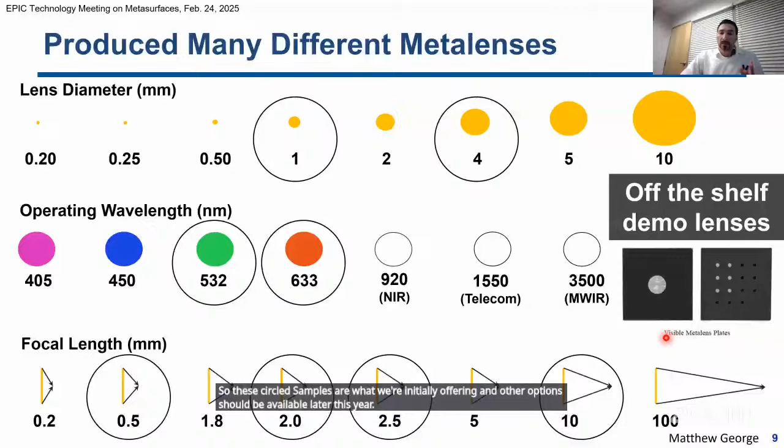So I'd like to briefly discuss some new and hopefully exciting Moxtek capabilities, including nano stacking of optical filter components at the nano or micro scale. So traditionally, when multiple optical filters are bonded together, they can become quite thick, especially when multiple substrates are involved. Utilizing our overcoat technology, we can stack various filters on a single substrate at the nano scale, including wire grid polarizers, wave plates, meta optics, color filters, and so forth.